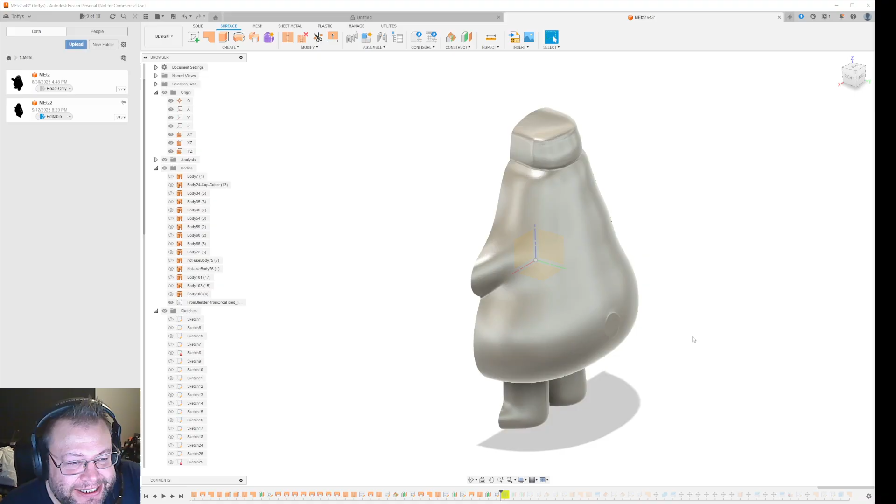So I am gonna do a Fusion video today. What I'm gonna talk about today is something I have spent nearly 2 weeks trying to do, and it turns out to be the simplest thing ever. Well, that's what you learn. So I have this STL file.

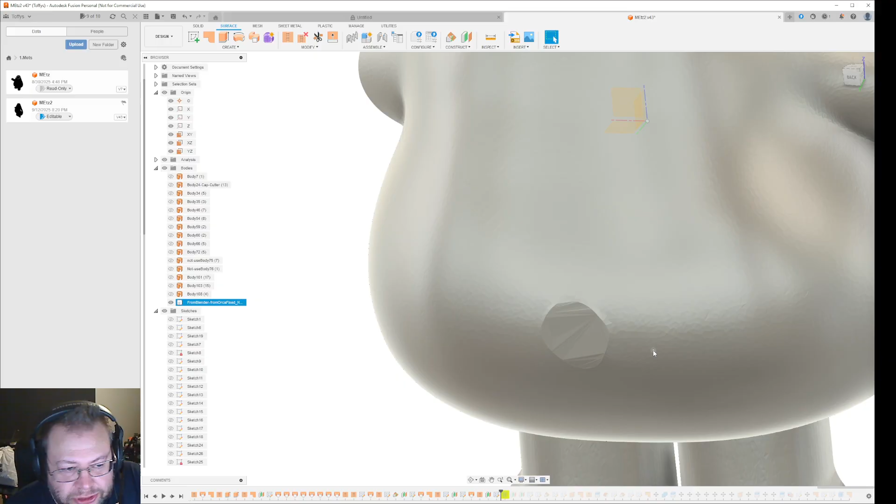I brought it in through Blender, and it originally had a tail on the back, and I want to make this as similar to the rest of the body as possible. At first I tried to just make a line and cut around it using Revolve or something like that, and it didn't look good. Then I tried to extrude it down and fill it with patch, but of course it was flat.

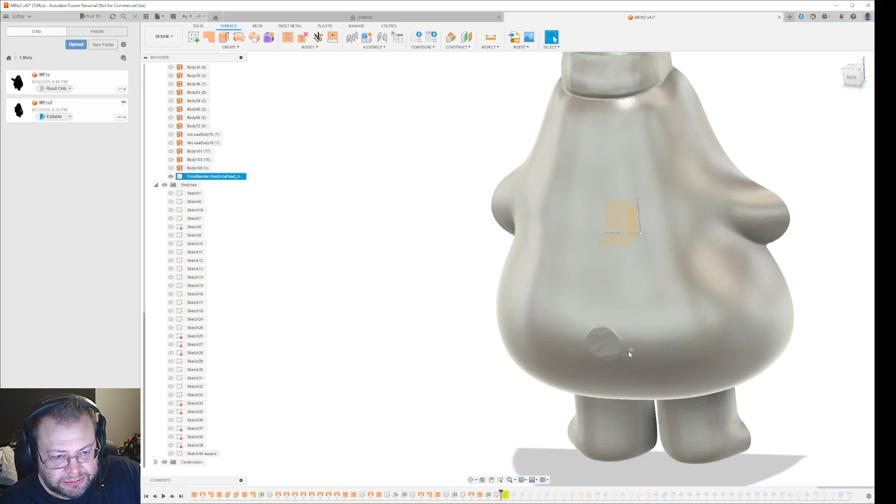And then I tried to use, what do you call it, construction planes to cut it off. And what I then got was a lot of small edges, because this one is built up of a lot of rectangles. As you can see here, it's jumping from place to place. So basically a lot of rectangles made up the edges. After almost 2 weeks I got kind of frustrated because I couldn't find a way that this works.

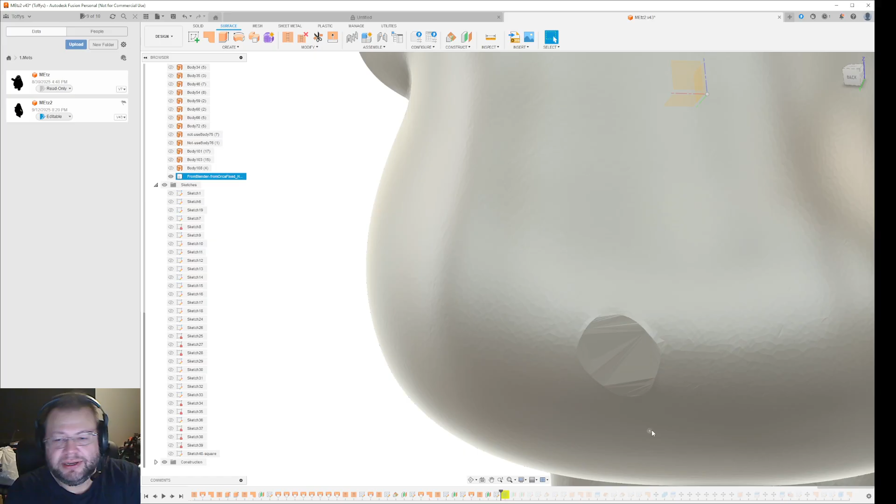I even modeled the X and Y properties of the curves of the body, and I tried to use loft in surface mode between the curves, between the bodies, between other surfaces. It's like when you do something and you just try and try and try, and you just cannot make it right.

Now, I did have a guy on a Facebook page who basically told me, let's see if I can find his comment here. That is my post. I ended up going to a Fusion forum and just asking. Gavin Townsend said, go to the surface tab. Use the square to split the face. Remove the face, then patch and stitch. Might have to toggle the setting with patch to tangent.

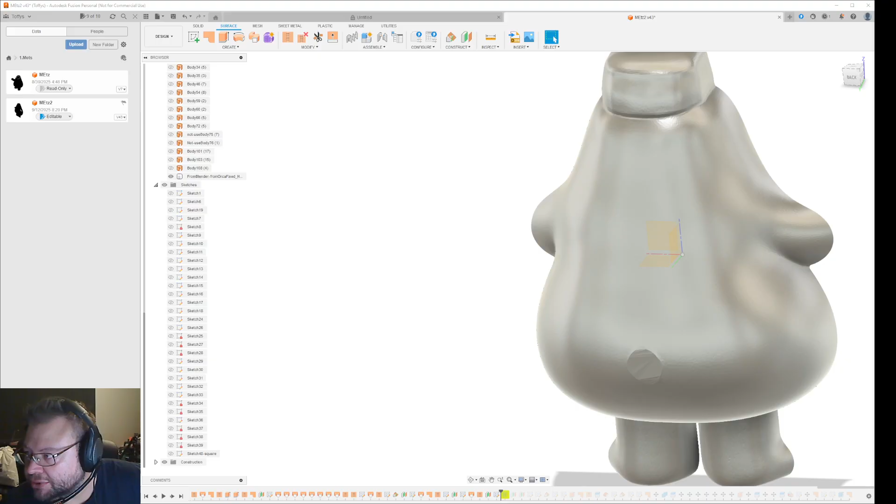Now, if I did exactly what he said with a square, I would get a big chunk of the body out. One of the ways I've been trying to do this is by saving the surface positions, and then trying to use tangent to loft to the lines by using rails. I'll pause the recording and show you. It takes a while for the model to load because it's kind of complex. I've been working around the concept you can see in front here. It's kind of slow to update.

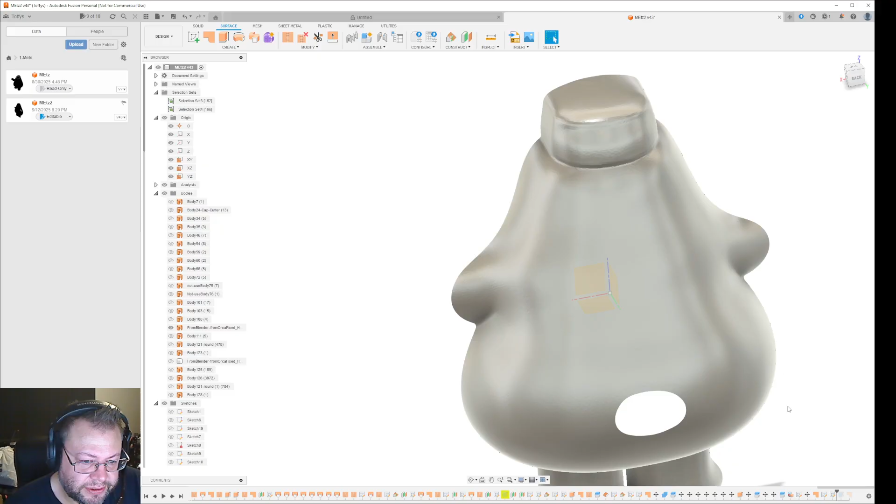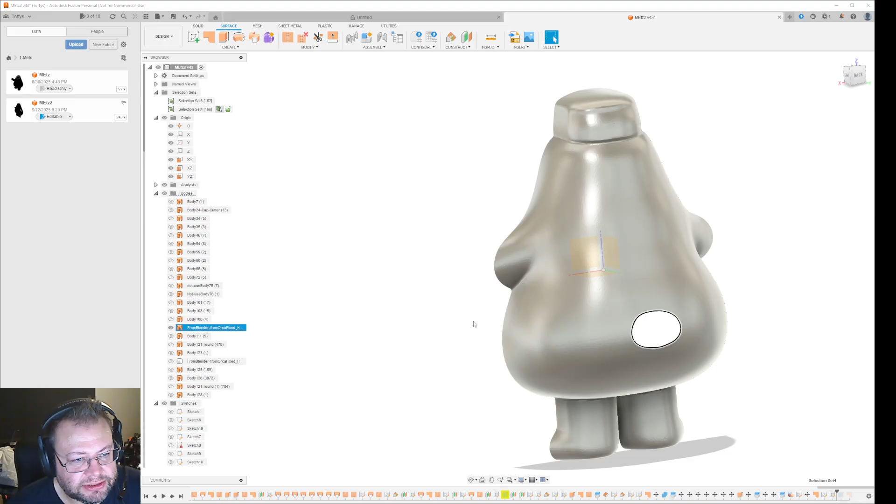So I've been dealing with the edge there. You can see I removed the surface, and that makes the whole thing into a surface body. If you see up here, you can save the selections you do to selection sets. In this case I have this one, and I can go in and say, okay, select. So I can select the edges I already pre-selected here, and there are a lot of them. Some of them are extremely tiny.

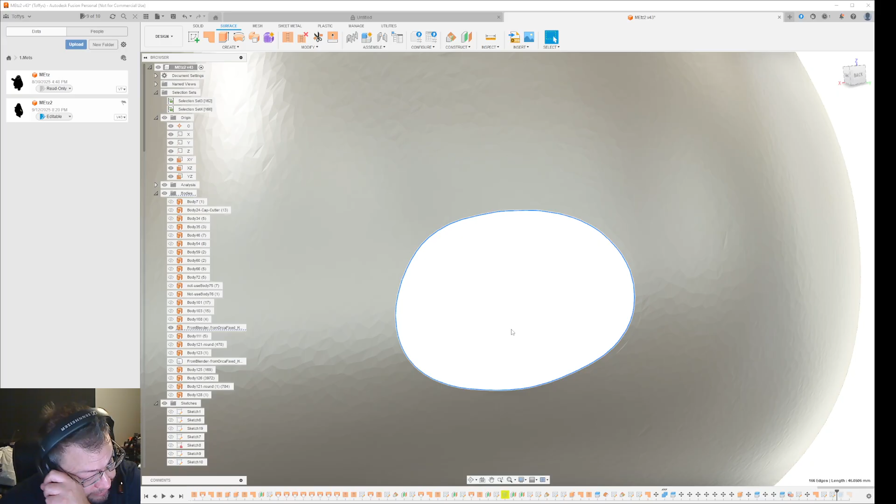One of them is like 0.01 millimeter wide, and it's really a nightmare to try and loft or patch this and use tangent, because you will get so many objects that it wants to work with. If I use a square, I would have 4, but I wanted to use as few as possible. So I was thinking, okay, what if I just extrude a circle? I was thinking of the way he said it, using tangent, because I know that tangent is supposed to take the shape of the area around it, but the more edges of faces you have, the longer it takes to calculate and the harder it is.

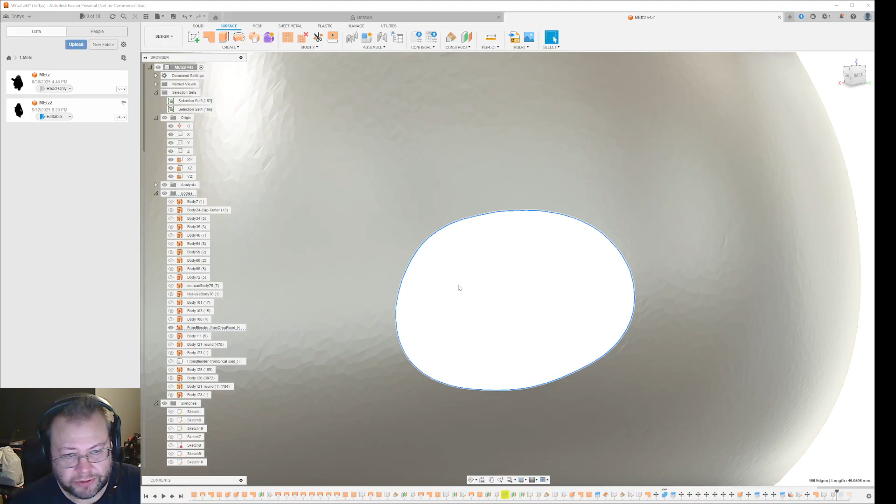When you have a circle, it's just one straight line going in a circle, and I was thinking that would make it easier for the tangent to work. So I did an extrude of a circle over this hole here, and it basically looks really good.

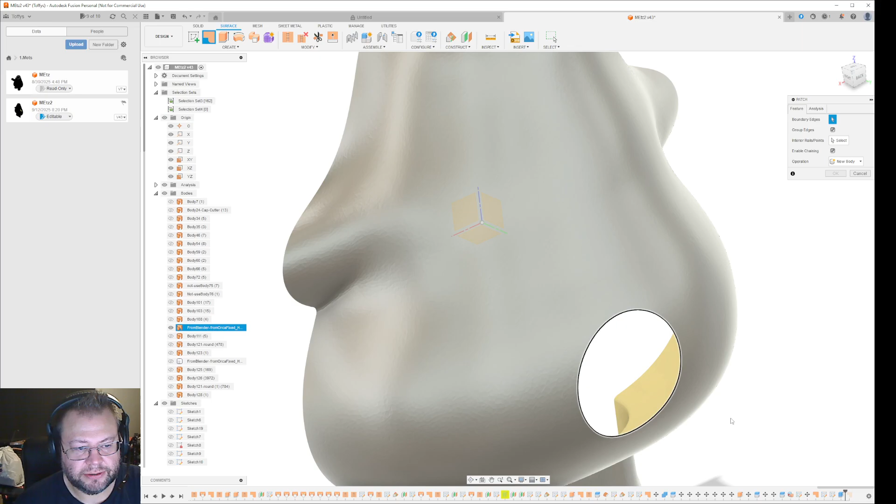Then I went in and clicked the patch tab, and you can see when I select here, it only selects one edge, and that is brilliant, because when I then click it like this, I get a flat surface that is barely connected. It's basically just following the curve of the edges, but I want it to be even more accurate. You will have a lot of lines like this if you have a lot of edges you're trying to tangent.

Ooh, it's so late. This one is just one, so if I go in here and select tangent, it will read the surrounding area outside the circle, and it tries to bend the surface you're trying to patch to match the curves from all sides. And since the circle is just one side, it's easier for it to calculate the curve.

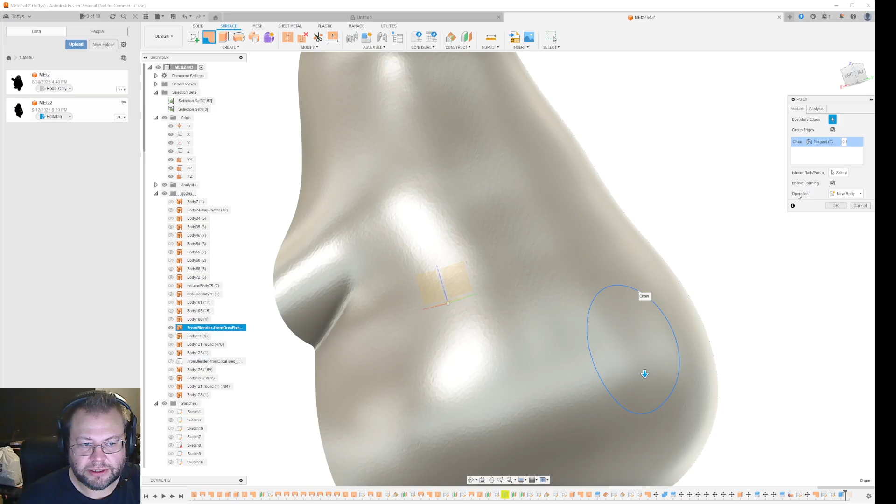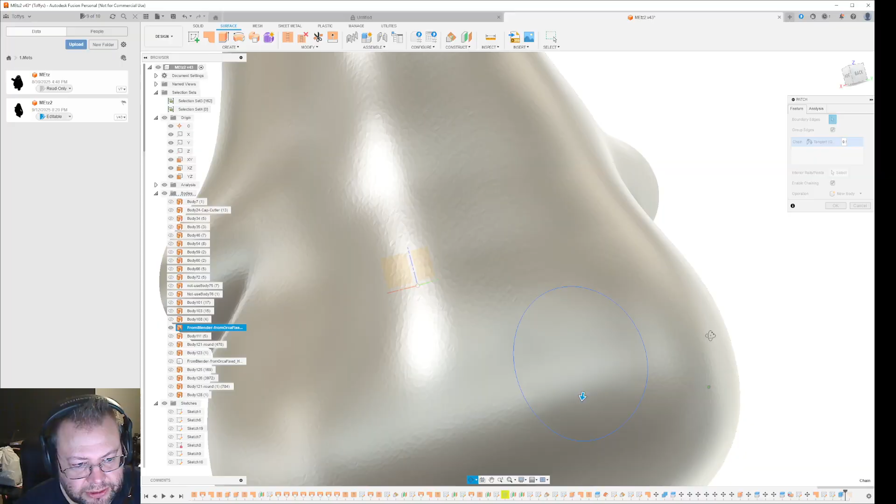And I was really surprised when I selected tangent here how good that actually looks afterwards when you use tangent and you use a circle as a cutting, as an edge tool, literally. I think this will look really great when it's printed with a 3D printer, and I don't think I could have done it any better than that.

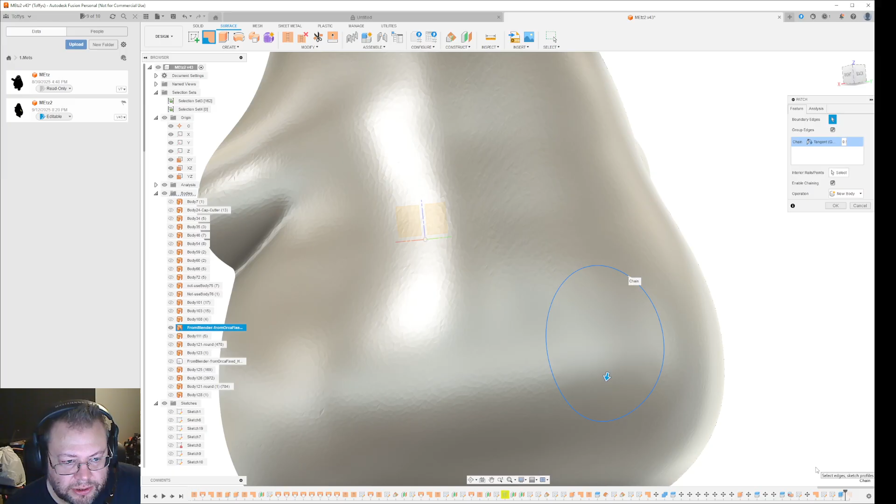So I feel grateful to the guy on Facebook who gave me this tip, because I've been trying to use rail lines and other guides or sweep it around or whatever, and it just turns out the simplest is usually the best option. Of course this is a separate model now. I'm just gonna cancel that because I have it here already. What you can do then is select the main body, select the new thingy, and then just use the stitch, and it will take a long time, I think.

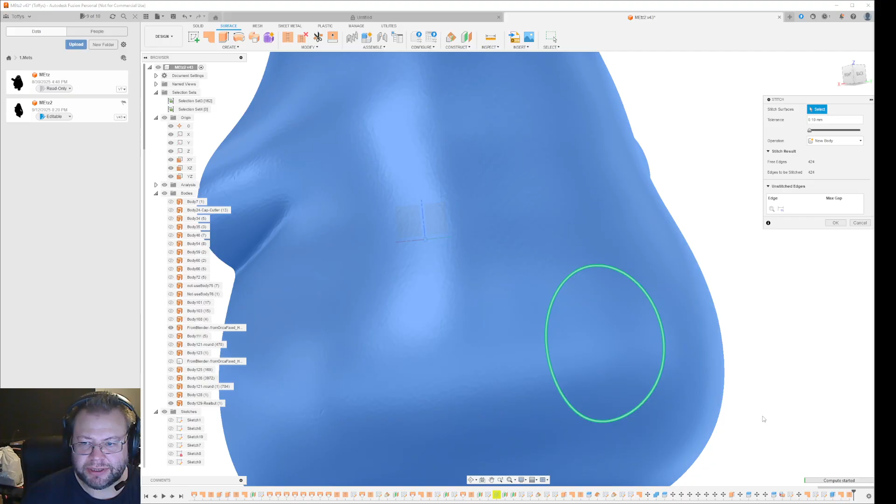So that took a good 10 minutes. You can see it's still struggling a little bit. But because I did a cut as a circle, the stitch is also going to be perfect, so you don't have any problems with edges. And because this is the only opening I have in the model, once it's stitched it will be a solid object once again with a fixed rear end of the model. So I just thought I would show you guys how I managed to fix that thing, which has bothered me for almost 2 weeks.